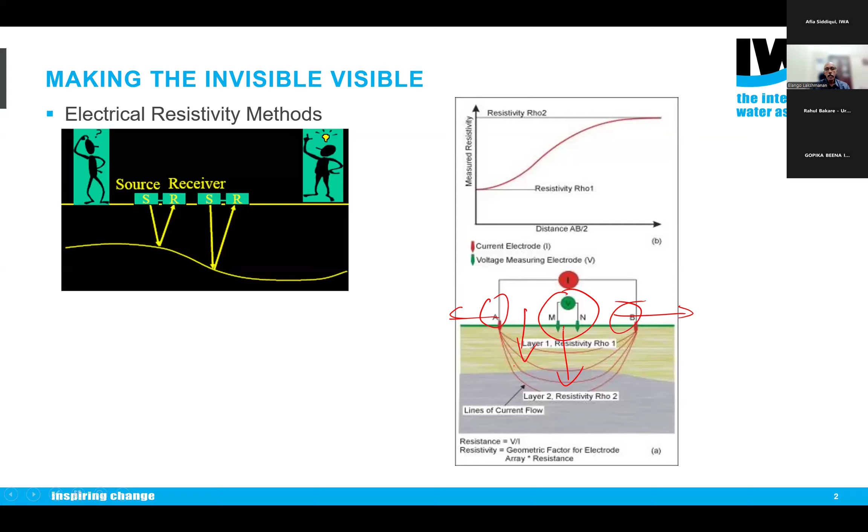This is how we are able to understand whether the formation is saturated, whether it is a clayey formation or sandy formation, and where the water table is. Here is an example wherein we are able to understand the spatial variation in a cross section of the electrical resistivity values.

That means the horizontal line is the ground surface. What you see here is vertically below a long profile. So in a profile, we see the spatial variation in a vertical section with reference to electrical resistivity, with the scale given at the bottom. So what we get from here, though the water is invisible, is that we can clearly demarcate a zone with very high salinity, shown in blue, which is the zone with the lowest resistivity. Whereas this section has high resistivity, probably devoid of any groundwater, most likely hard rock formation. This is how we see what is present below the surface of the earth using the electrical resistivity method.

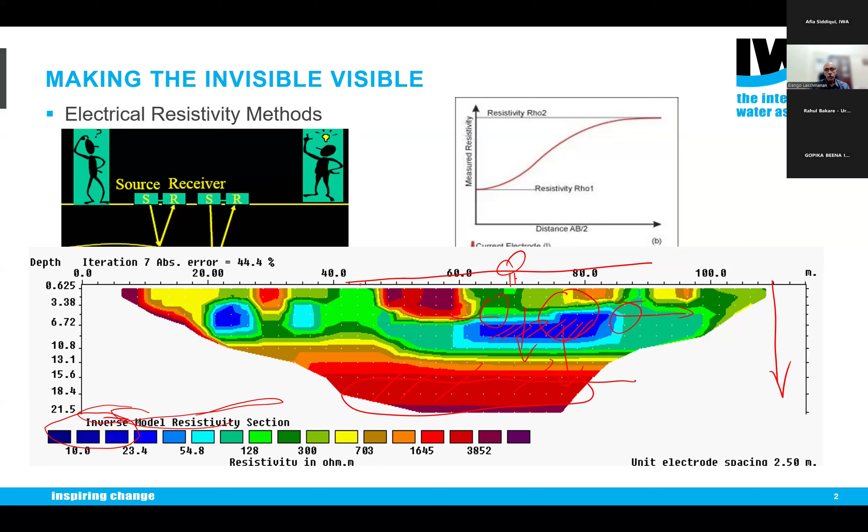Then the other tools are ground penetrating radar, often used to study the shallow subsurface. Here are two case studies where we deployed this ground penetrating radar tool to understand the subsurface beneath a river bed.

Here, what you see is a river, flowing this way, where a check dam was to be constructed to mitigate seawater intrusion just north of the city of Chennai. Before the site selection, we did several traverses to find a location without any confining layer very close to the river bed, so that a recharge structure would perform better. For that, we deployed ground penetrating radar.

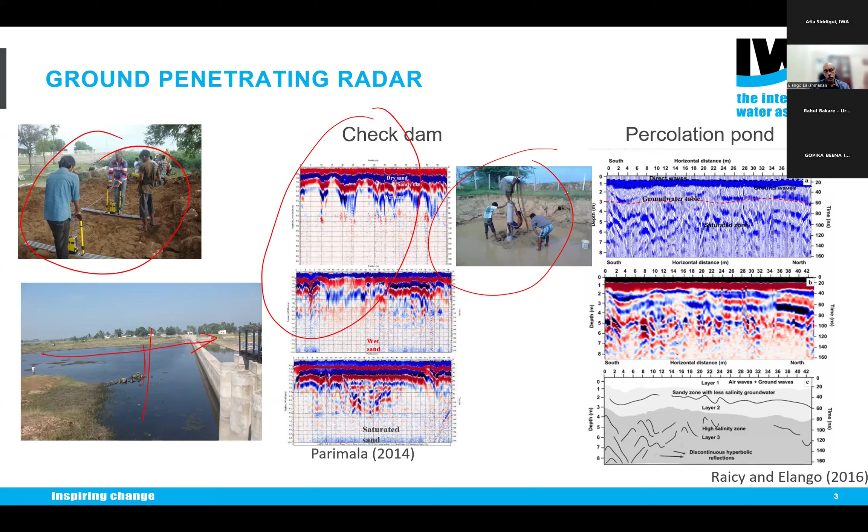Similarly, at another site, due to the need for improving groundwater quality since it was completely saline, a percolation pond with a shaft was tried to identify a suitable site. Ground penetrating radar can be an ideal tool to understand subsurface characteristics. The limitation, however, is it cannot go beyond 25 meters below the ground surface. So this is an ideal tool for locating recharge structures.

Another major tool, very popular over the last decade, is surface nuclear magnetic resonance imaging. In this method, a magnetic field is generated using a transmitter. This transmission changes the way protons are oriented beneath the surface of the earth due to the external magnetic field. When we stop applying the magnetic field, these protons realign themselves according to the Earth's magnetic field, and during realignment they produce a signal, which is measured using this surface nuclear magnetic resonance imaging.

The greatest advantage is that these protons are present mostly in water below the surface of the earth. Hence, indirectly, we make the groundwater, which is invisible, visible using surface nuclear magnetic resonance imaging. In fact, this is the only method which directly helps us identify where groundwater is below the surface of the earth.

There are several techniques. We measure the data by varying the generation of the magnetic field over the surface of the earth and study the response. We can also do what is known as an inversion technique, where we assume a certain subsurface model, produce the signal, then compare it with the measured data. By doing so, there is also an option to understand the water content present below the surface of the earth.

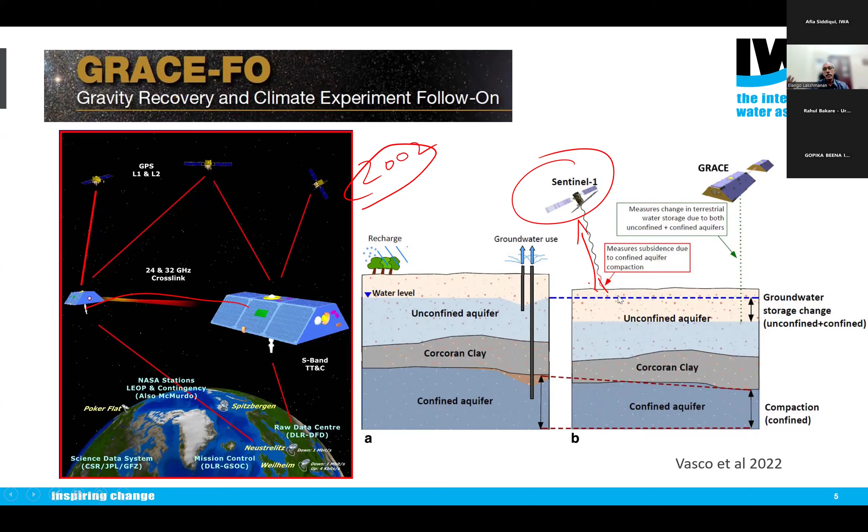So these tools are now available. Especially GRACE data is free, whereas for Sentinel data we have to pay to get the information. Here we have made use of GRACE data to understand how efficiently it is able to predict the groundwater head in and around the Chennai region.

So what we have plotted is both the measured groundwater level along with the GRACE derived groundwater storage. There seems to be very nice correlation. Similarly, with respect to time, the blue line is the gravity measurement, that is the GRACE derived value, and the red is the measured groundwater level. There seems to be a reasonable comparison, except for certain years towards later, which is attributed to seawater intrusion.

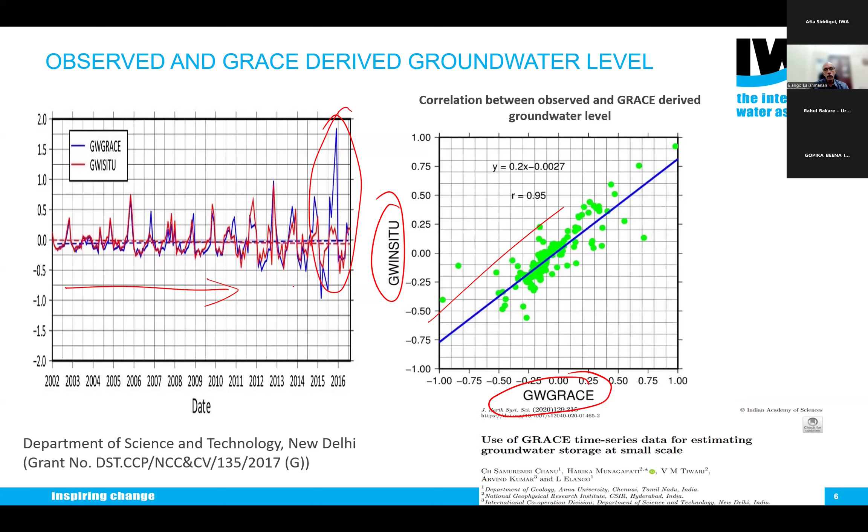Similarly, land subsidence, as I told you previously, can be estimated using synthetic aperture radar satellites. Here there is a tool called SARscape. This tool helps us understand land deformation, since the satellite goes over the same site at least once a month. Suppose you take data after a gap of 2-3 years, we will be able to know whether the land surface has deformed, whether it has emerged or witnessed subsidence.

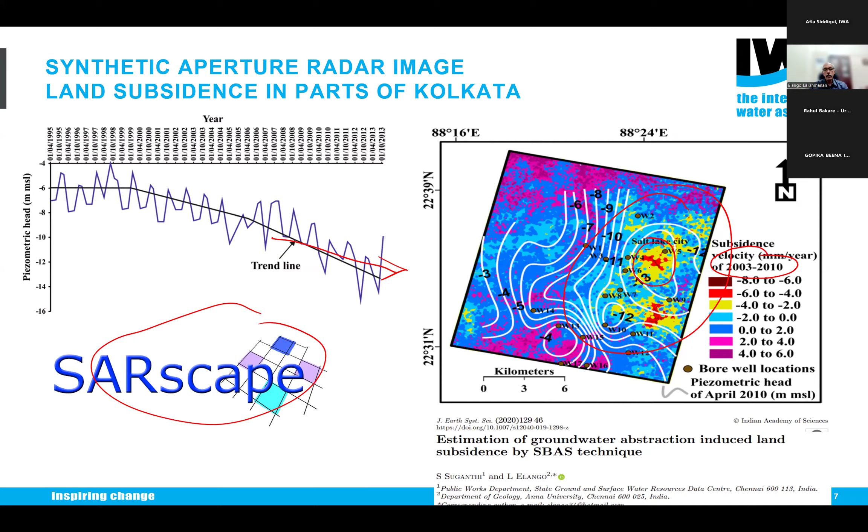Here is an example from Kolkata city, wherein you can see the land surface going down with respect to time. This is a bit old study, from 2003 to 2010, which we carried out using data from that period. That corresponds very well with the measured decline in piezometric head. The white lines here indicate the piezometric surface, which is lowest here, where we have witnessed the highest amount of land subsidence. So this is another tool to rapidly understand the variation in the land surface.

Geographical information system - using this tool, we have studied the variation in groundwater recharge potential zones for southern India. In which we used the AHP technique, which is nothing but a multi-criteria decision making, wherein we fix up a goal. The goal here is to differentiate the entire southern India into highly potential, moderately potential, poor, and very poor zones for recharge.

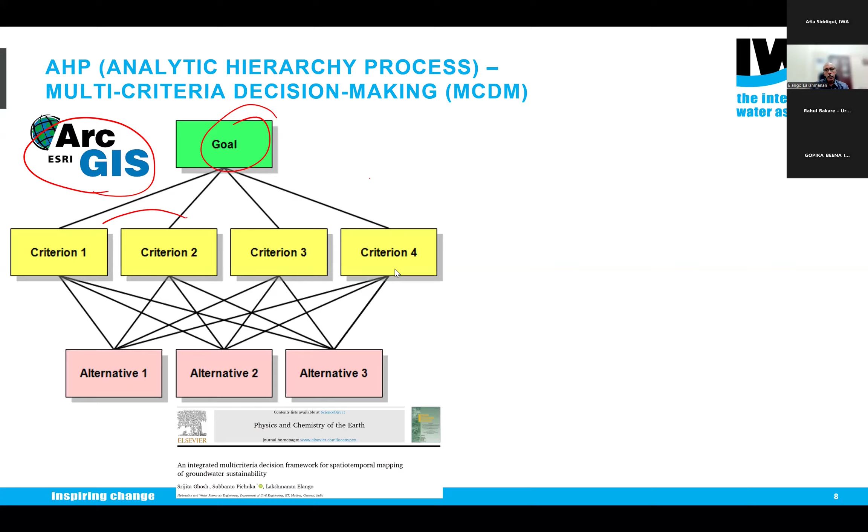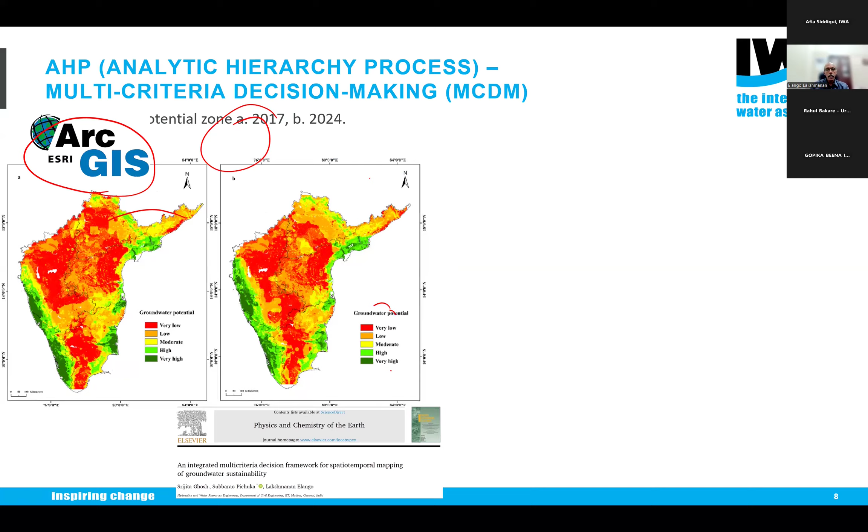So by assigning different criteria, for example geology, soil, slope, and so on, we can come out with different alternatives. Using this tool, we identified groundwater recharge potential zones for entire southern India. The novelty of this study is that we also identified groundwater recharge potential as well as groundwater potential zones.

So we need to integrate this. Whenever we plan for any new managed aquifer recharge structures, we need to identify poor groundwater potential areas wherein recharge potential is very high.

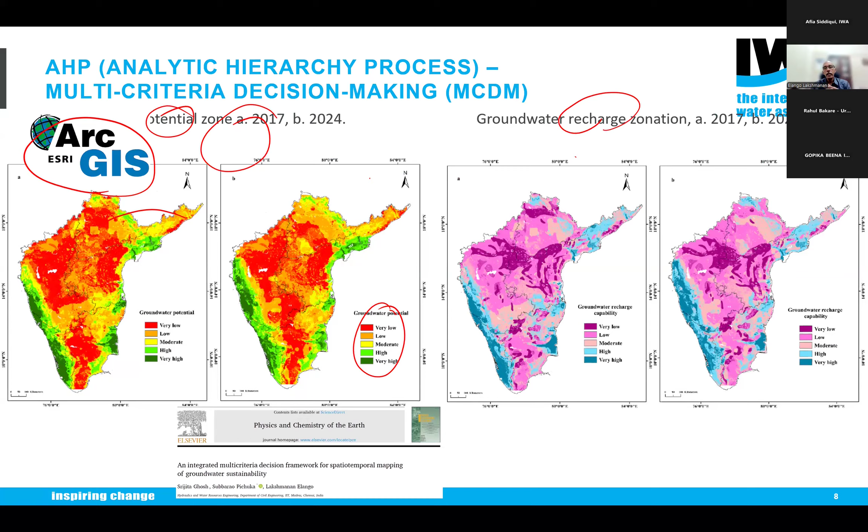This is another tool. Using the same multi-criteria decision-making tool, we selected ideal sites for recharging groundwater in Bangalore city. More than around 10,000 such recharge wells were constructed in Bangalore city, making use of the same technique. We could also get a visible improvement in groundwater level once we completed the construction of these 10,000 recharge wells.

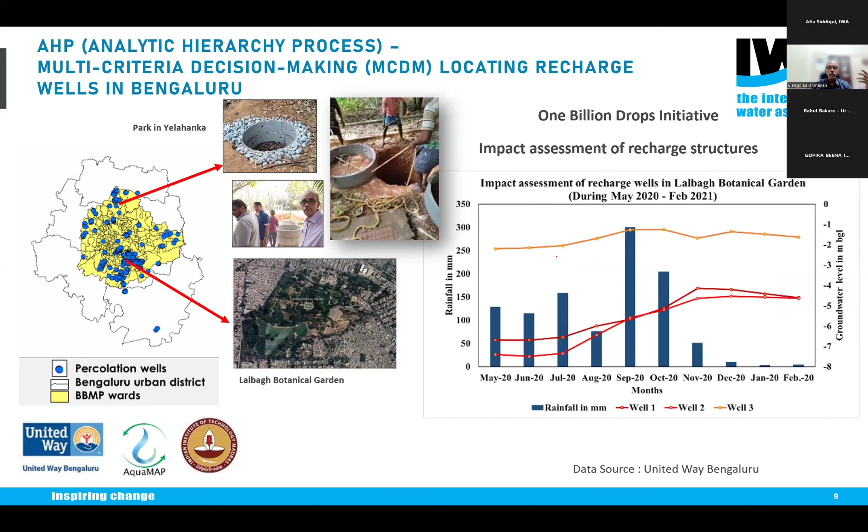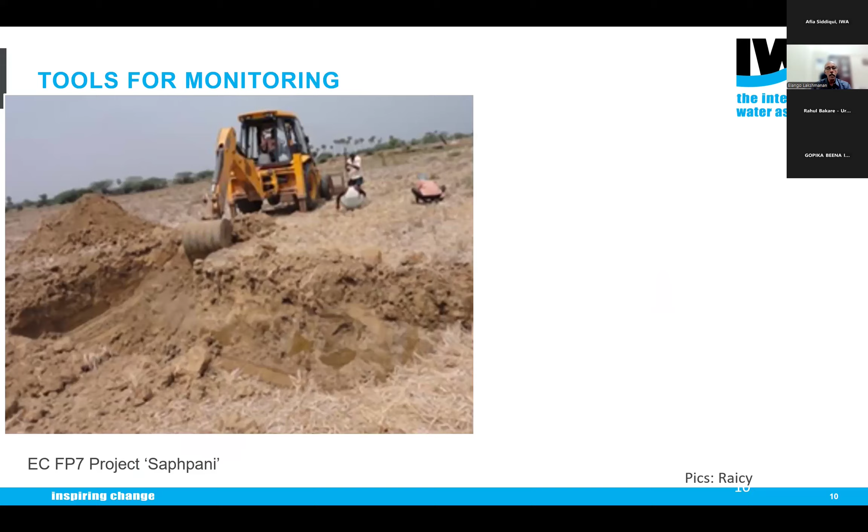There are several tools required for groundwater monitoring. We used several tools in one of our case studies involving construction of a percolation pond, which I had indicated previously, wherein we did a ground penetrating radar. A percolation pond was constructed to improve the groundwater quality for supplying water to a small rural community. The entire area is highly salinized due to the proximity of this site to the sea as well as the backwaters, wherein we constructed a percolation pond.

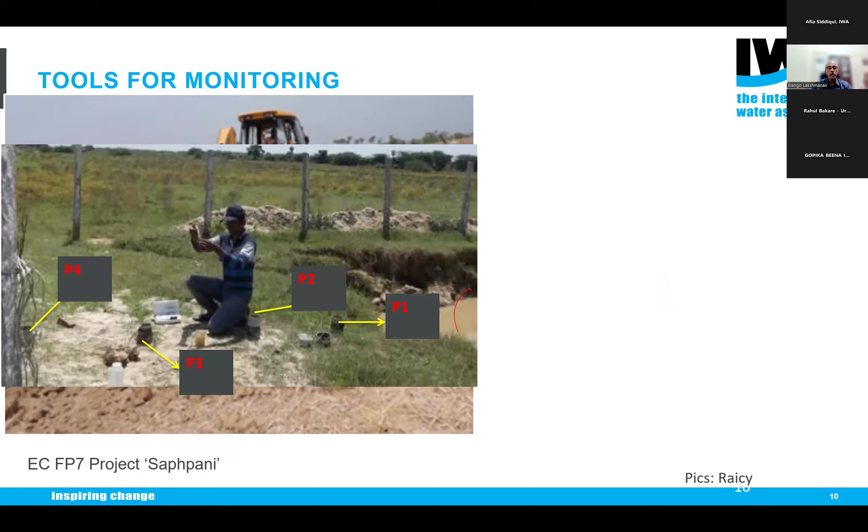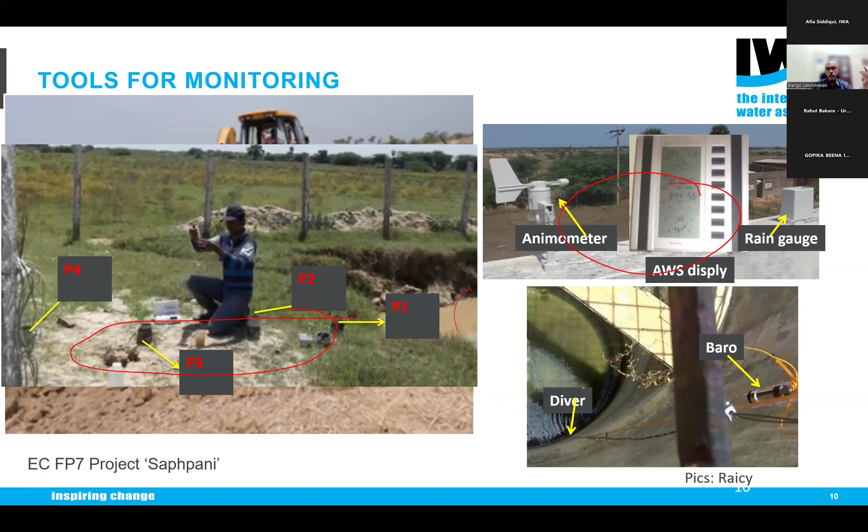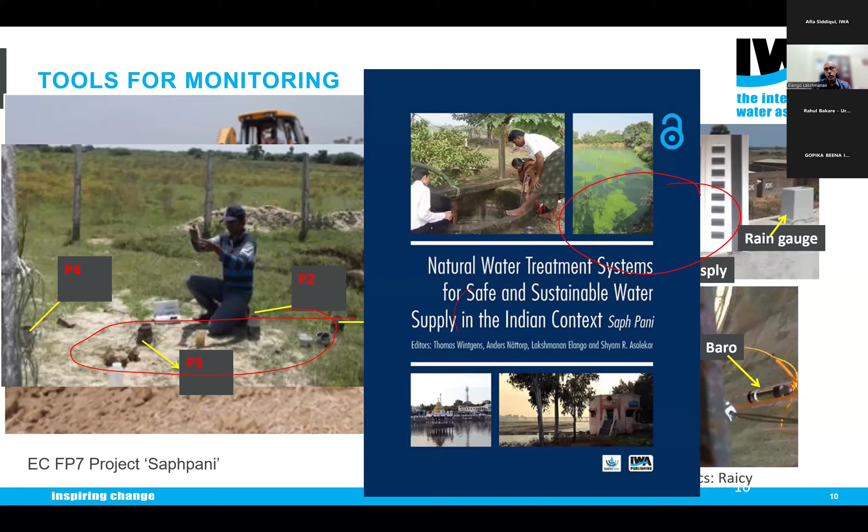In order to understand the efficacy of this percolation, we also drilled 4 piezometers adjacent to it, and these were heavily instrumented using several advanced tools, including an automatic weather station and multiple probes, to understand the groundwater potential in the pond as well as a nearby well and all the piezometers. This research was published as part of a book published by IWA. Those who are interested can have a look into this for more details.

And one of the common problems which we face, especially after severe rainfall, an extreme event, is that suddenly the ground surface gets flooded, and the water table is somewhere here.

This is the groundwater table, but the ground surface gets flooded, leaving a lot of air entrapped between the saturated or flooded surface and the saturated zone. Due to the presence of these air bubbles, water is unable to infiltrate into the groundwater. Though we have plenty of flood waters at the surface, they are not really benefiting groundwater recharge due to the entrapment of air. We thought, how about providing small tubes in the unsaturated zone so that during floods, the air entrapped due to the pressure of flood water may escape through this.

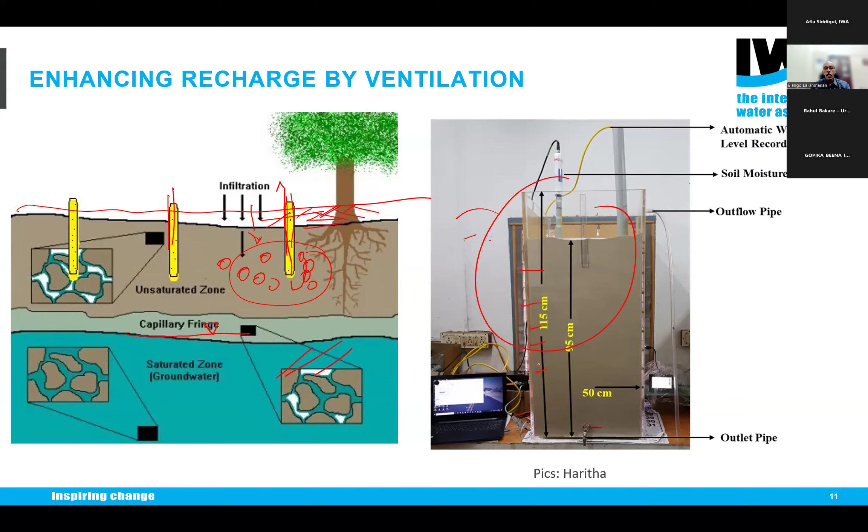This concept was presented to the Ministry of Science and Technology, and they funded a project. So we did several experiments in some sand tanks, as you see here, with moisture sensors kept at frequent distances from the surface. We also put an automatic water level recorder to study the effect of this flooding. Then we also carried out some field experiments.

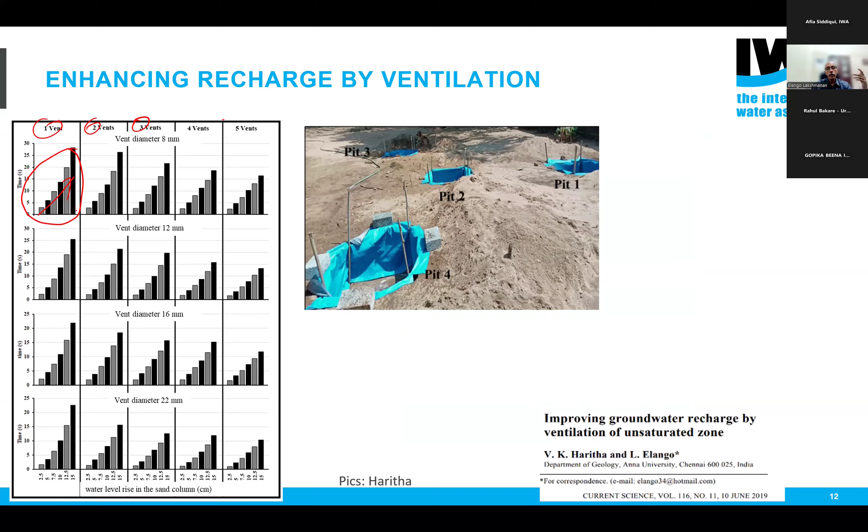The experiments support that the presence of vents, for example 1, 2, 3 and so on, help to quickly recharge the groundwater. This technique is able to overcome the problem of entrapment of air. We also filed a patent for this technique.

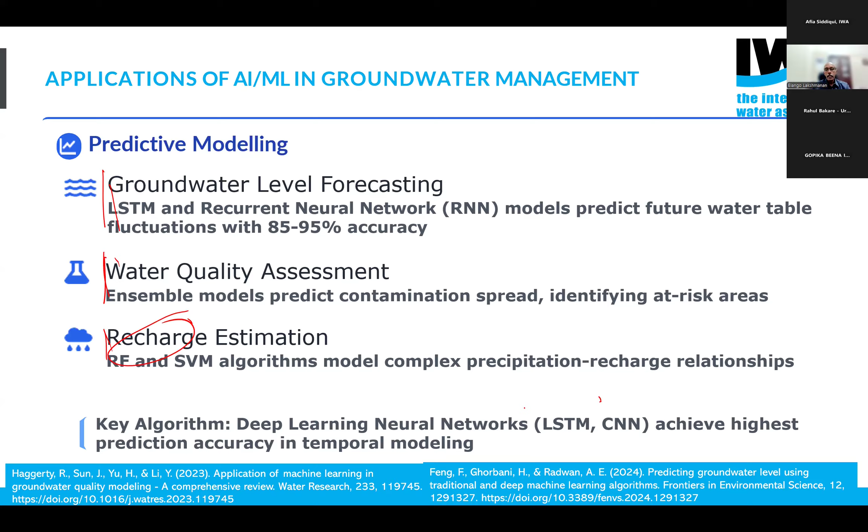Coming to artificial intelligence and machine learning in groundwater, a number of researchers have very efficiently used AI and ML tools, especially for predicting groundwater level, groundwater quality, and groundwater recharge. These are all the popular themes in which people have applied artificial intelligence and machine learning. Most researchers have used these tools to achieve their objectives. I'm just presenting two examples.

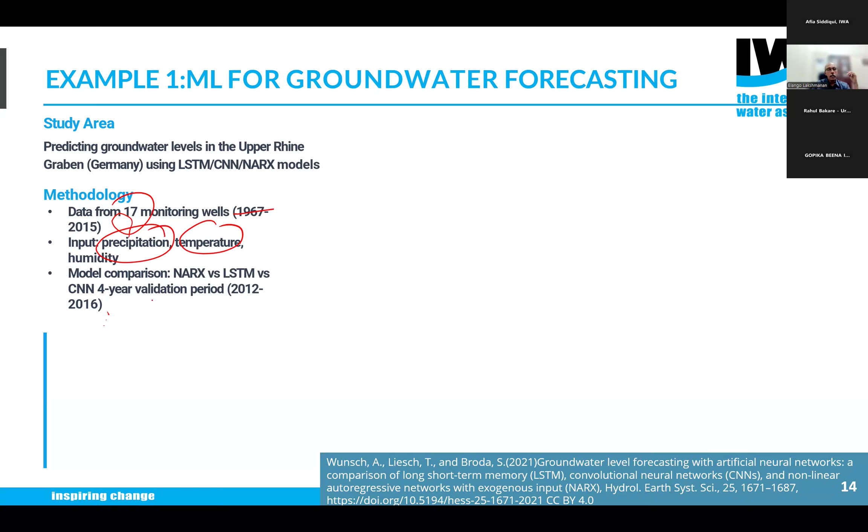In one example carried out in Germany, the authors used machine learning to forecast groundwater level. They achieved reasonably nice results with merely 17 monitoring wells, but they had long-term data from 1967 to 2015, and considered three important variables: temperature, precipitation, and humidity.

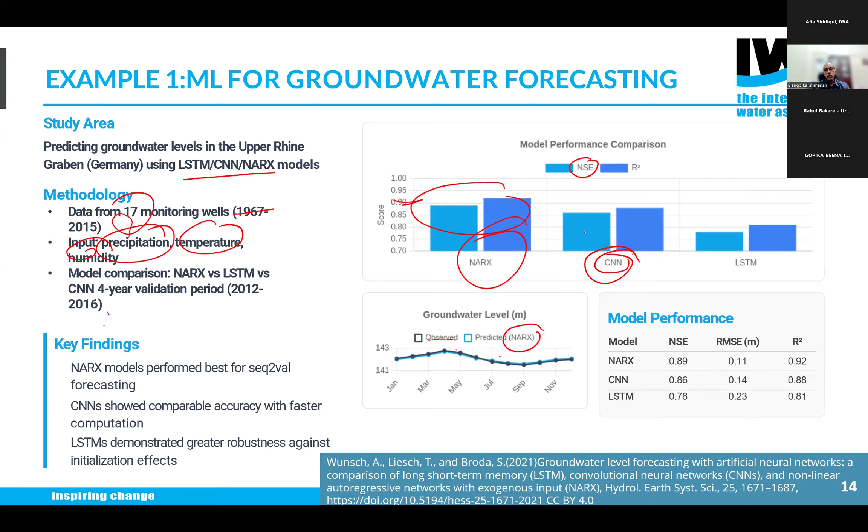We also used something similar to predict groundwater quality in one part of India, in Karnataka, where we have been collecting groundwater samples once every 3 months for about 4 years from over 50 wells, for which we applied machine learning coupled with an ant colony optimization tool.

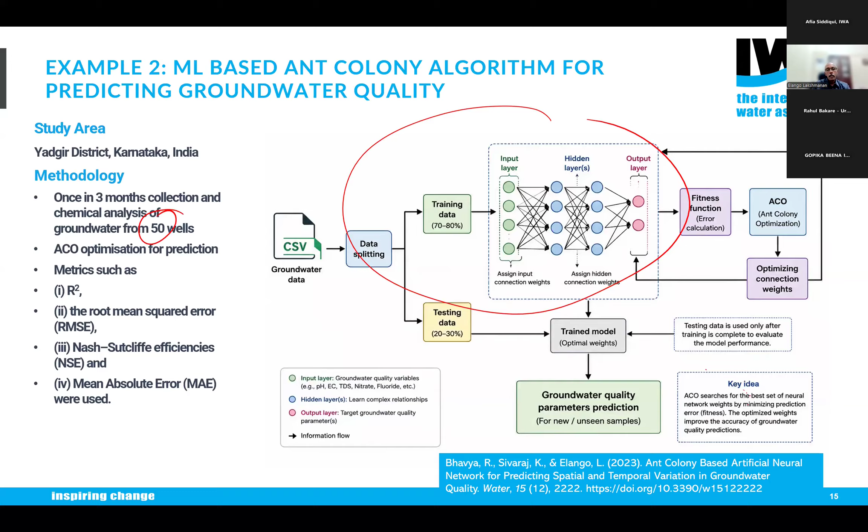Let us not go into depth here; this is published, and details are available in the paper at the bottom. What is interesting is that we used nearly 70% of our data for training, and the rest of the data was used to test the results of the model.

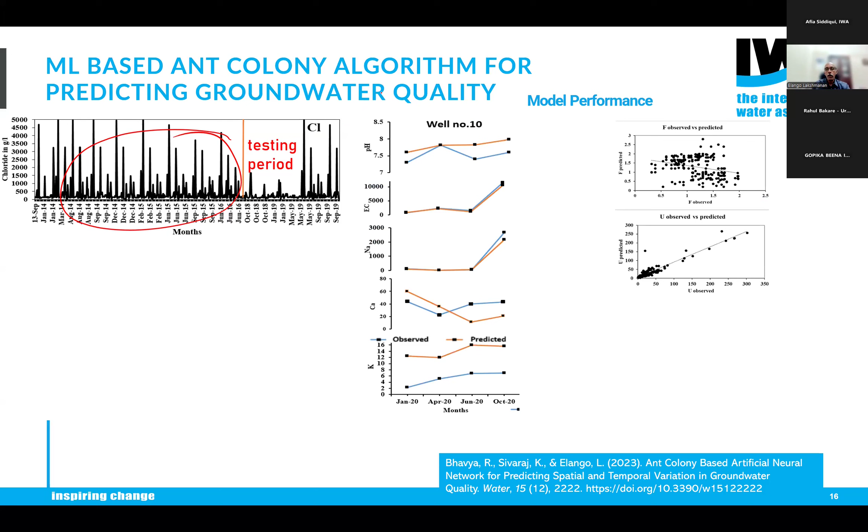Here I'm showing you results for uranium concentration, which is very important. There is a reasonable comparison between the model predicted and observed values. We also checked how the 50 different well models predicted concentration, and then used an inverse distance method to extrapolate the concentration over the entire area.

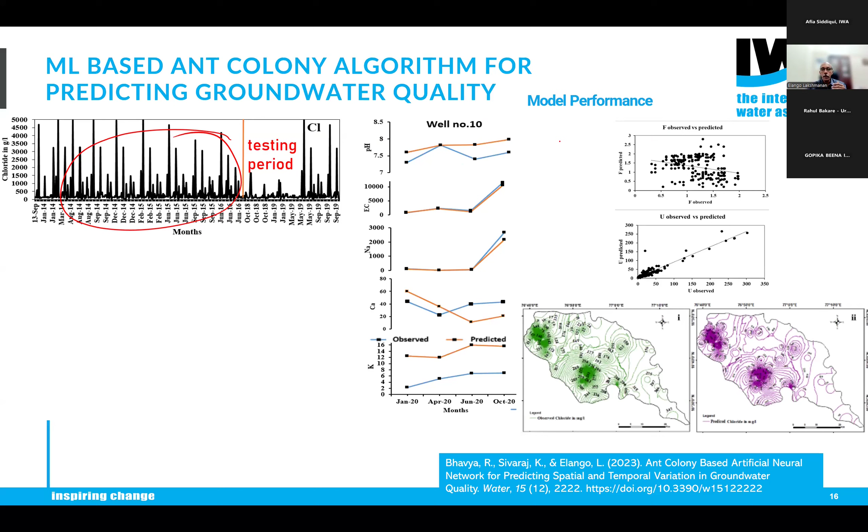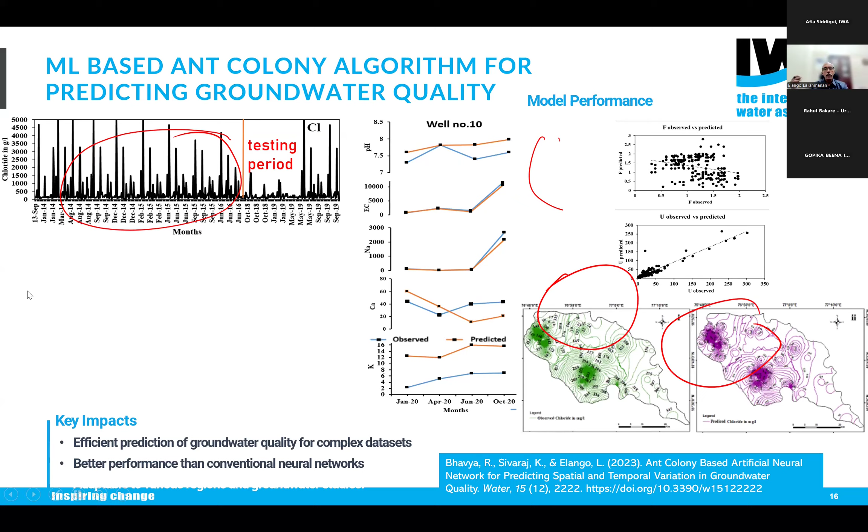We compared the observed values, shown on the left in green, with the model predicted values on the right, and there is a reasonable comparison. So these models are able to very nicely predict groundwater quality. Though we are using several other contaminant transport models, this machine learning tool seems to be a very good way to estimate groundwater quality.

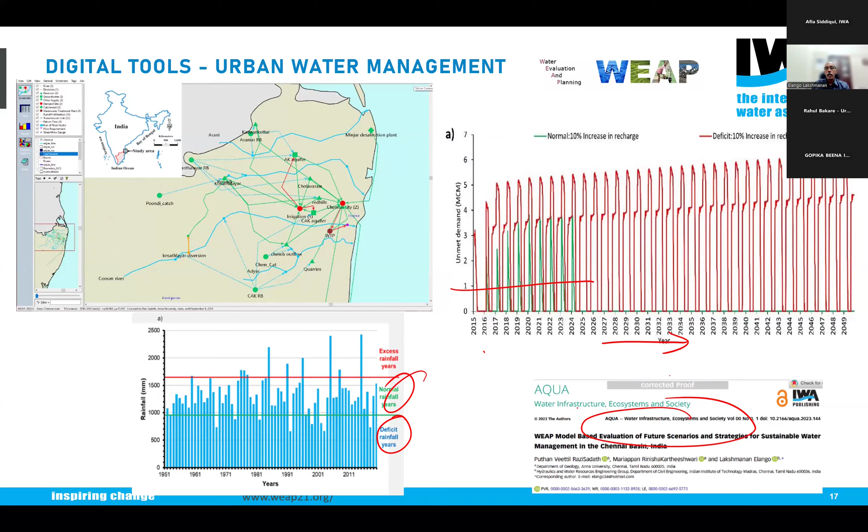We played with the model by considering different rainfall patterns—excess rainfall every year, normal rainfall, or deficit rainfall—and how much the unmet demand would be. Suppose we put forth 200 MLD of used water into the supply chain, how would we meet the unmet demand? Details are available in this paper. So this is how the WEAP model can be used.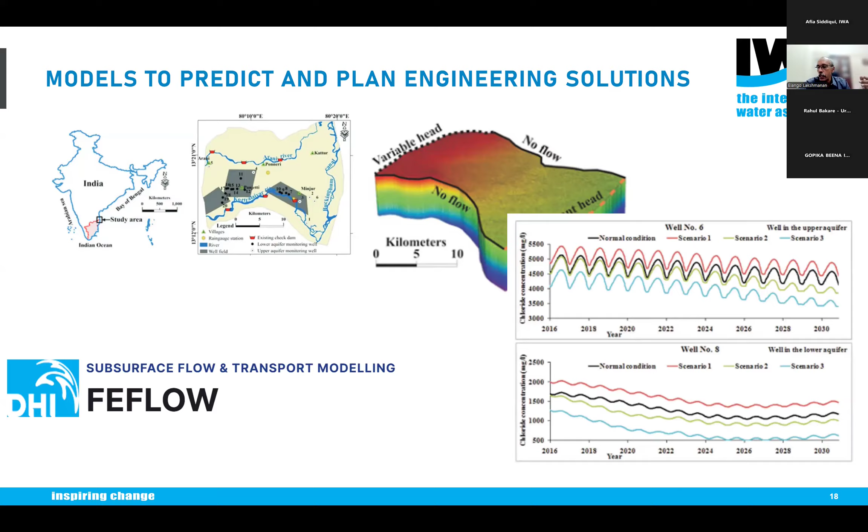We also ran the model to forecast different climate change scenarios, and what you see here is the impact of this. To conclude, we are currently working on a major digital twin. A digital twin is replicating what exists in nature into a computer-based system with real-time analysis and people's participation, wherein we are coupling several models. It is a collaborative project between India and Delft. That is it, thank you very much for your attention.

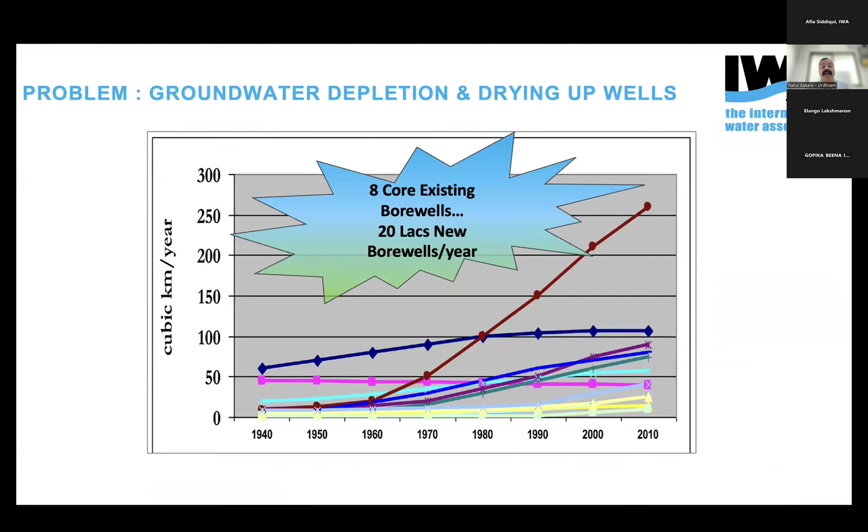India is the largest user of groundwater, with around 8 crore, that is 80 million, existing bore wells and open wells. Through that, we are overexploiting groundwater to a great extent—so much so that farmers are committing suicide, women have to walk far away places, water has to be supplied through tankers, and water quality is becoming a major issue. In some cases, uranium and chromium have started appearing in groundwater. Groundwater in the Indian context is one of the major water sources—80% of India depends on groundwater, and this is the problem we are facing.

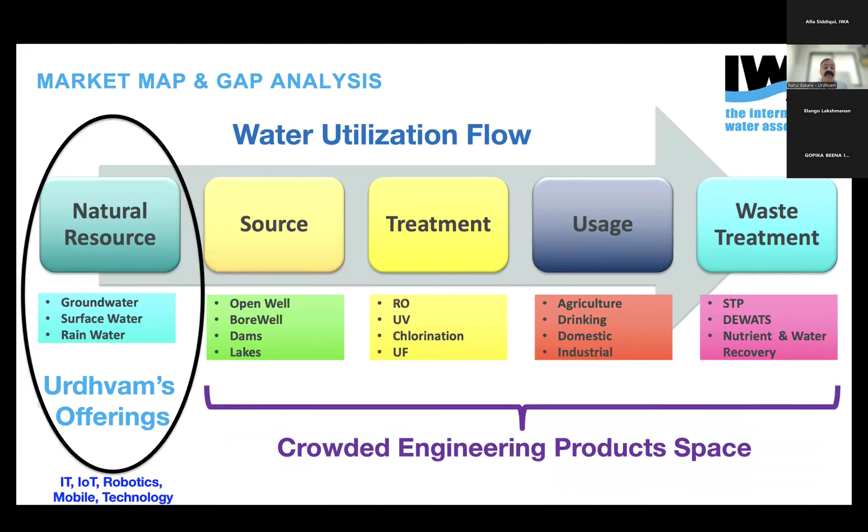When we map the water utilization flow, we realize there is something called a natural resource, which needs to be developed and treated, then it's used, and wastewater is generated and treated. That is the water utilization flow. From source development to waste treatment, there is a lot of crowded engineering product space. We provide solutions for the sustainability of natural resources—be it groundwater, surface water, or rainwater—using a lot of IT, IoT, robotics, and mobile technology to solve people's problems on the ground.

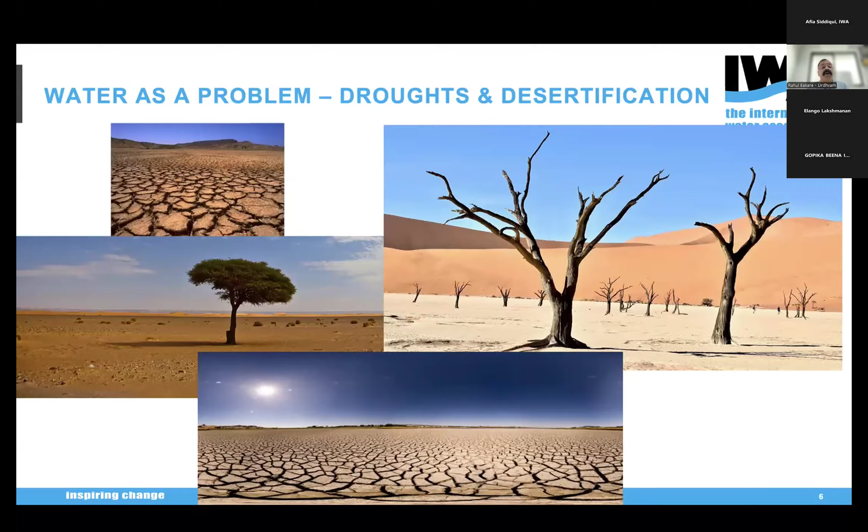So why do we need to think about groundwater? Because groundwater is invisible, it is unseen, hence not understood, not appreciated, but it is creating tremendous amounts of problems, and that's why we should learn about it. Because of groundwater issues, droughts and desertification are happening all across the world. Groundwater is also one of the reasons why deforestation is happening.

A lot of deforestation is also happening because of climate change. The recharge regimes are changed because of the change in rainfall patterns and intensity. It's also creating deforestation and droughts, and desertification. Afforestation is a solution for that.

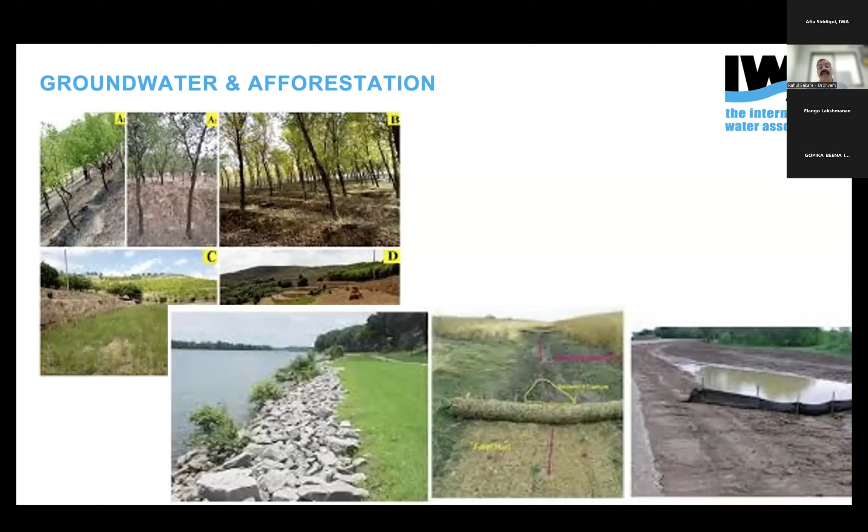But currently afforestation doesn't take into account groundwater regimes. People should know where to plant which kinds of trees depending on the hydrogeology. Typically afforestation is done based only on agroclimatic zones, but for the plants to live, sustain, and grow, one needs to understand groundwater hydrogeology.

Rivers are drying up. In many places rivers flow only during the rainy season, and during the non-rainy season there is no water because the base flows have dried up. Why have the base flows dried up? Because water in the unconfined aquifers in many parts is pumped at a much faster rate than nature can replenish, so base flows are reducing and rivers post-monsoon are not providing water to the civilizations.

Water is also a major problem because when we construct a road or create an escarpment, that creates a weak zone for hydrostatic pressure to be applied, and that creates landslides. Landslides are also caused by friction between particles, pebbles and stones getting reduced because too much water seeps into the location. Unfortunately, many construction activities - houses, roads, even watershed treatments - are done without any understanding of hydrogeology, which creates more problems than it solves.

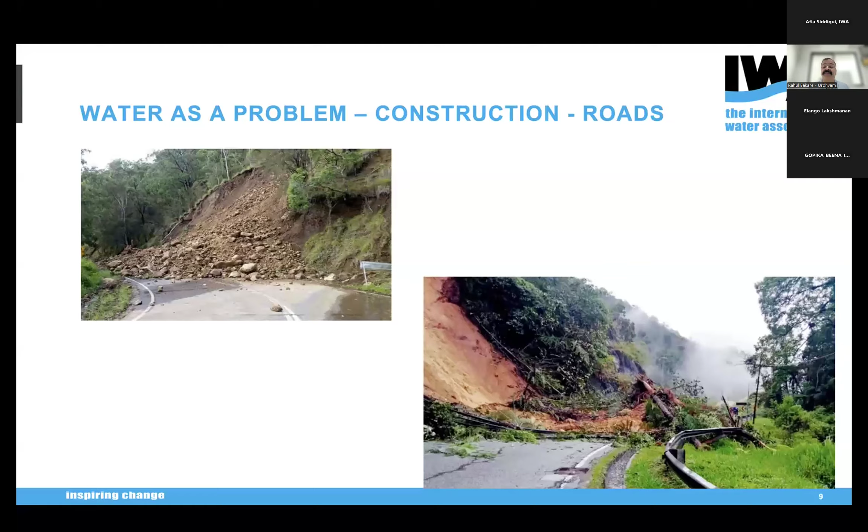We have seen near my city a village which was entirely swept away by a landslide, because without understanding the hydrogeology, a huge tank was constructed upstream, which was a farm pond. That farm pond during a very torrential rain evening succumbed to the water, which created tremendous force on the slopes, and the entire village was flooded and buried under mud.

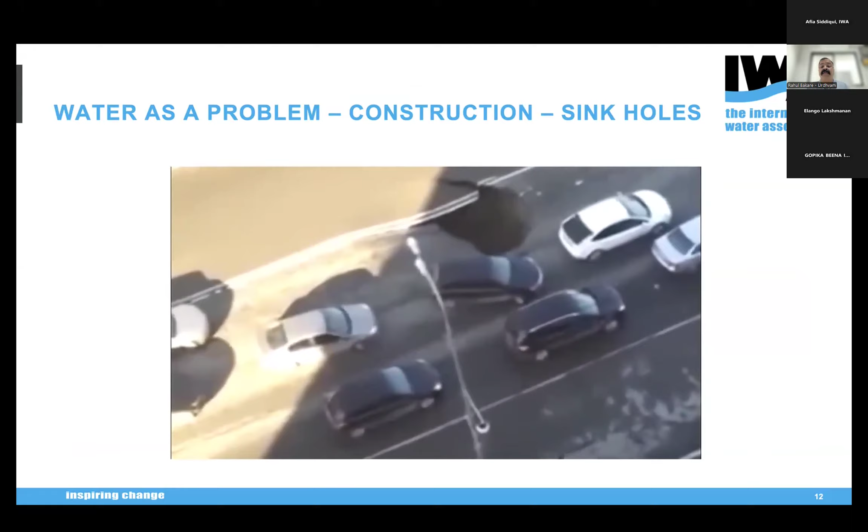This happened because people didn't understand the hydrogeology when constructing that farm pond in that location. At the same time, we have also seen sinkholes happen in many places because of not understanding the underground water regimes, causing a lot of destruction.

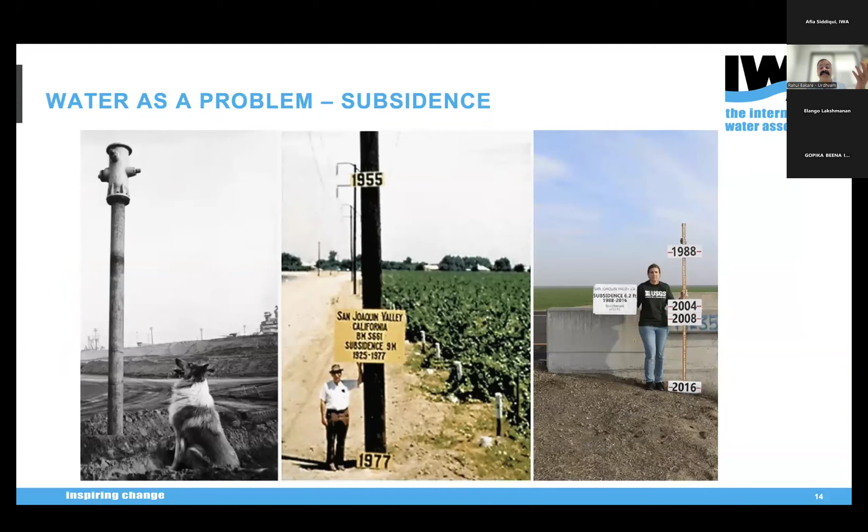Groundwater also causes foundations to fail or topple over, and households also topple over. Land subsidence is another major issue faced by many people. In the California context, 9 meter subsidence is seen in some places, creating tremendous problems to groundwater assets.

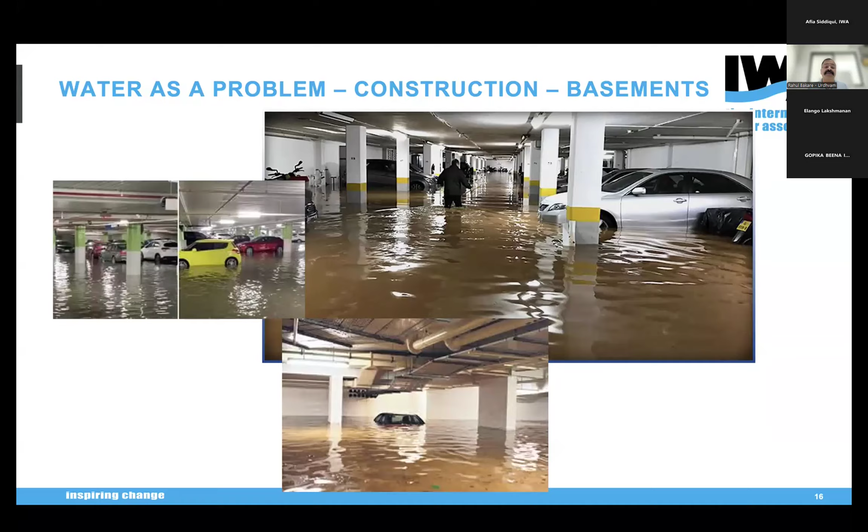These are the basements which are flooded every rainy season in India, because hydrogeology is not taken into consideration while constructing those basements. Hydrogeology is very important, critical, and crucial, but unfortunately it is not considered. It is considered while mining, but even there, flooding of shafts and mining shafts is already seen.

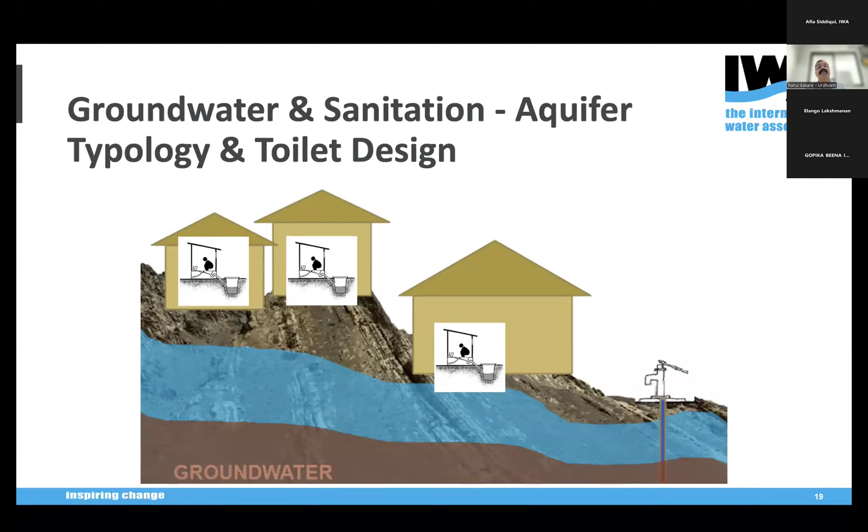Lastly, groundwater also needs to be considered while developing sanitation infrastructure. In the Indian context, pit-type recharge systems and pit-type toilet construction create tremendous problems in the rainy season, because a lot of that water becomes groundwater and gets transported downstream. So even something as simple and distant as sanitation needs to take hydrogeology into consideration.

There are three major gaps in the groundwater domain that we have seen. First, awareness and education among the general masses doesn't exist. People don't know - they have vivid imaginations about groundwater, whether there's a stream flowing underground, or a pond, or a sea of sweet water, but nothing of that sort exists. Unfortunately people have that kind of visualization. Second, people want more and more supply for their day-to-day and economic activities.

People want more and more water, and groundwater supply is not managed properly. So demand management also needs to happen, because a lot of water is given to plants in agriculture through furrow irrigation, and because of that a lot of water gets lost in evaporative losses.

So we work in awareness and education. As I said, awareness education is a very important part of it. We have developed a gamified visualization for education and awareness generation on groundwater behavior, because giving people animations, they are not able to imagine it.

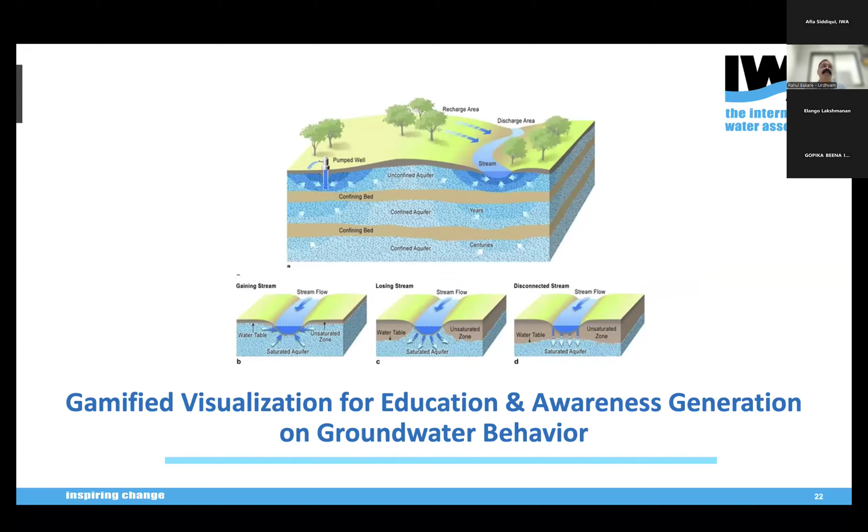So we have developed this see-through model of groundwater behavior, on which kids or even adults can put rain on top of it and see how the groundwater behavior happens. It can be simulated through gamification of education, where difficult to visualize 17 to 18 scenarios can be generated by themselves through play, and by that they are able to understand groundwater behavior. Because it is gamified, there is better retention of this understanding in their brain, and long time recall happens. That's what we have seen and observed in the Indian context.

We also work on supply augmentation. We have developed a patented smart rainwater harvesting technology that recharges and revives existing low yielding or dry bore wells, in which we do inter-aquifer transfers, with due scientific understanding.

When rainfall happens, the topmost part of the earth system gets filled up very quickly, but through different hard rock layers, for the water to reach up to 200 feet it takes hundreds and thousands of years. And from there to reach up to, let's say, 600 feet, it takes thousands of years. So that is the slow nature of groundwater recharge.

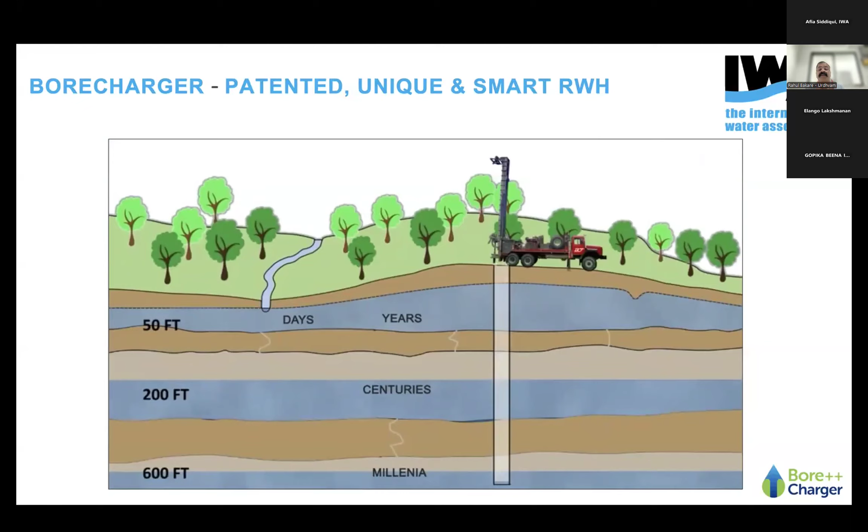But when we drill a borewell, the driller makes one hole up to, let's say, 600 feet within one day. What we see on the surface is a casing pipe, impervious PVC or MS steel pipe, which doesn't allow any debris to fall into the borewell. But along with that, the replenishable water from the topmost aquifer also doesn't enter the borewells.

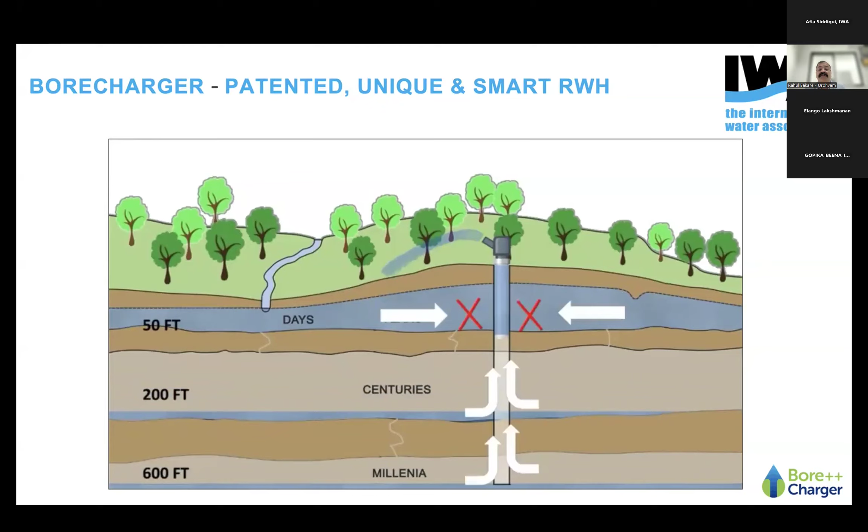So borewells typically get water from the lower aquifers, whose natural recharge is very low and slow, but our electromechanical pumping is very fast. Because of this imbalance, typically initially good yielding borewells slowly become seasonal, and many of them go dry completely.

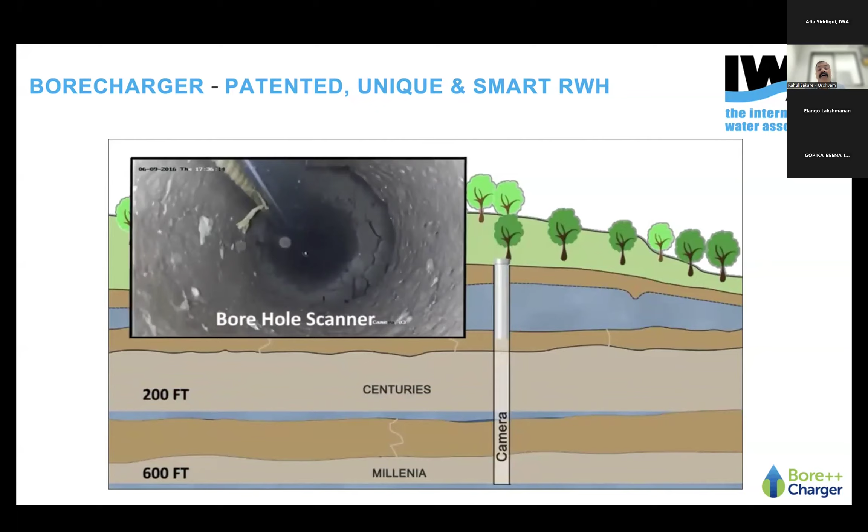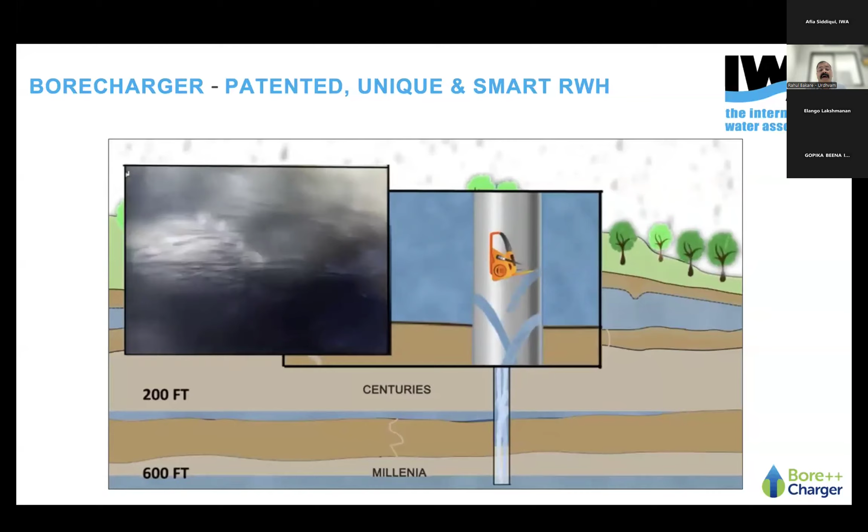So in bore charger technology, our trained hydrogeologists undertake angiography of the borewell, and we put our patented tool after in the borewell, and we perforate that casing pipe at hydrogeologically appropriate depth, so that only filtered water will come into the borewell, and it artificially gets injected into this borewell, reaching 600 feet within few seconds - what would take thousands of years - and gets readily stored at those greater depths.

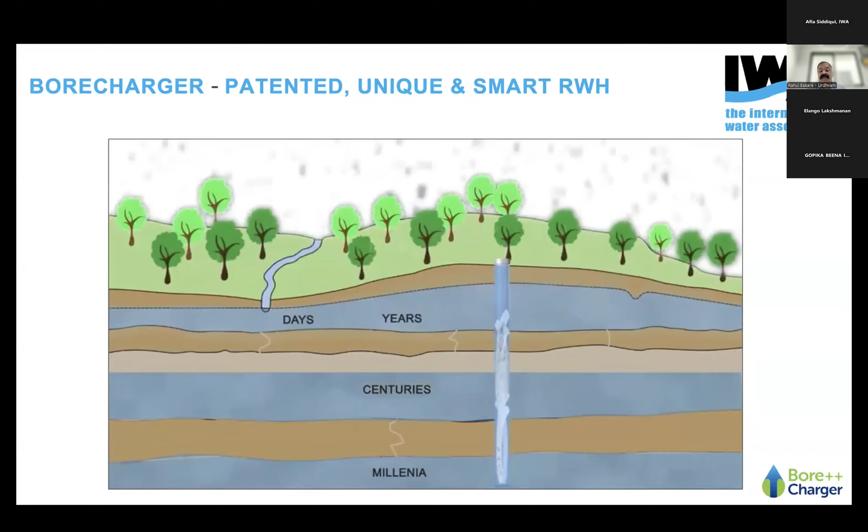So this is kind of a vertical smart rainwater harvesting technique that we have been able to develop, and we have implemented more than 7,000 borewell recharges, and we have seen tremendous amount of traction. These are some of the classical successful implementations.

What are the real world problems faced by people, and what's the impact of bore charger technology? Nabi Saab, a farmer whose agriculture income was very low because his water level used to go down to 450 feet every year - because of bore charger technology, his agriculture income rose by 85% within one year itself, because he started getting 6 hours per day of water compared to 1 hour per day during summertime.

Shivaji Suryavanshi, a sarpanch, a local body chief - his village drinking water borewell was pumping only 30 minutes per day, and his village was water insecure. After bore charger implementation was done, this pumping increased to 4 hours per day, and his village became water secure.

Rakesh Koti, an urbanite, had 15 minutes per day worth of borewell water. It increased to 3.5 hours per day, and his completely dried up borewell also started yielding because of this inter-aquifer transfer. Because of that, he saved 600,000 rupees a year towards tanker water supplies.

So overall, the socio-economic and ecological impacts of bore charger are quite clear. We are able to increase the recharge rate 4 to 20 times, anywhere between 200,000 to 8 million liters of rainwater gets added to the borewell every year.

This increases supply by an additional 1 to 6 months, and along with quantity and quality improvement, we have seen a 95% plus success rate. We have reduced the vulnerability of farmers to weather shocks, and we have also reduced a lot of tanker water supplies.

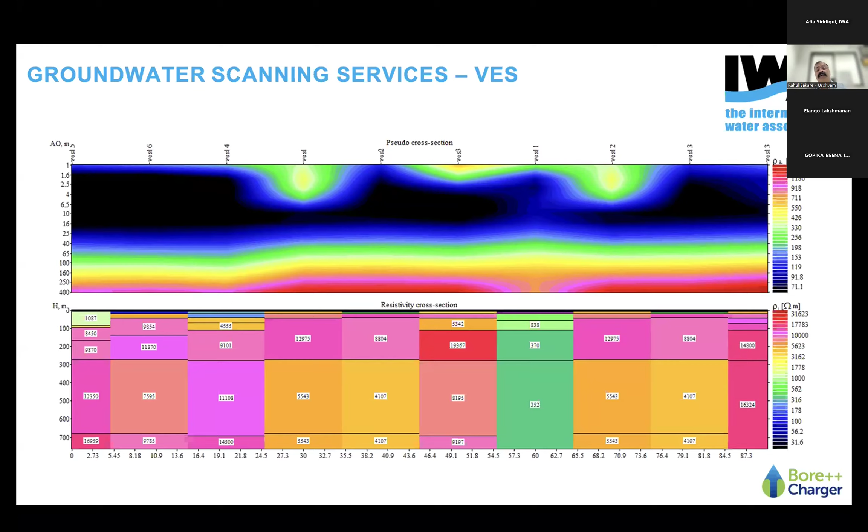So how do we use this kind of cross-section of the Earth system, invisible to our naked eyes? When a diviner gives a borewell location here, it obviously won't fetch much water because the dark blue zones, which are highly porous, don't have much interface with this borewell. But if we had done this scientifically, we would have shown a location that would yield much more water.

Same goes for the rainwater harvesting pit. If it's placed here, in this yellow-green zone, it doesn't have that much porosity, so it won't be efficient. But if we use scientific methodology, we can identify a better location for rainwater harvesting.

The same applies to the location of an open well or a recharge pond structure for a watershed. I myself have evaluated many watersheds where the end user says, 'Sir, in February we still see so much water in this percolation pond.' But you cannot call that a successful implementation, because water remaining in the tank till February means it has not percolated—so you've created a storage pond instead of a recharge pond.

We have worked with many CSRs, NGOs, and government programs, first studying the watershed with the help of hydrogeology, land use and land pattern change, slopes, and many other factors. Based on that, we do aquifer mapping of the entire space and then provide scientifically correct, accurate, effective, and efficient locations for the structures to be constructed.

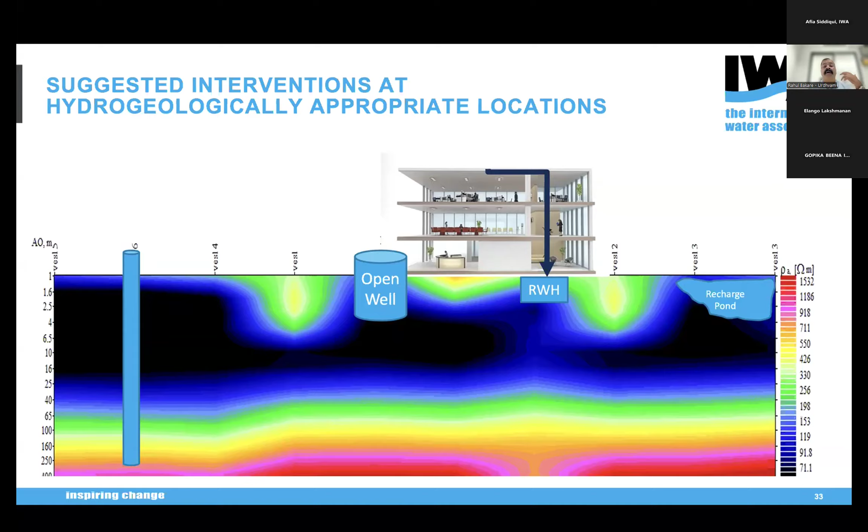So groundwater is extremely important. We also use geomagnetic technologies to understand the potential to find water underground. Lastly, from the demand management side, we developed Jalstr, a scientific groundwater measurement and prediction technology—basically a piezometric sensor that is IoT enabled, giving real-time visualization and predictive analysis.

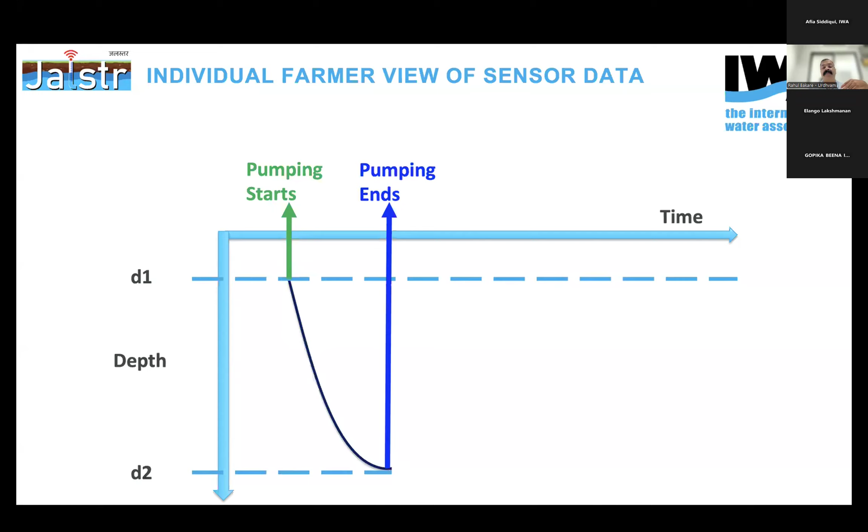To give a classical example, for one sensor or one borewell, we can see when the pump starts, the water level is here. After some time, the water level goes down with pumping, and when pumping ends, the water level reaches another depth, much lower than before. After pumping stops, the water level also recuperates slowly.

For one borewell, we are able to provide the volume of water pumped out. With this, farmers are now able to undertake informed decision-making, such as which crop to plant next, cropping area, cropping variety, and so on. Based on this, many farmers have increased their income, and many have also been able to take additional crops during summertime.

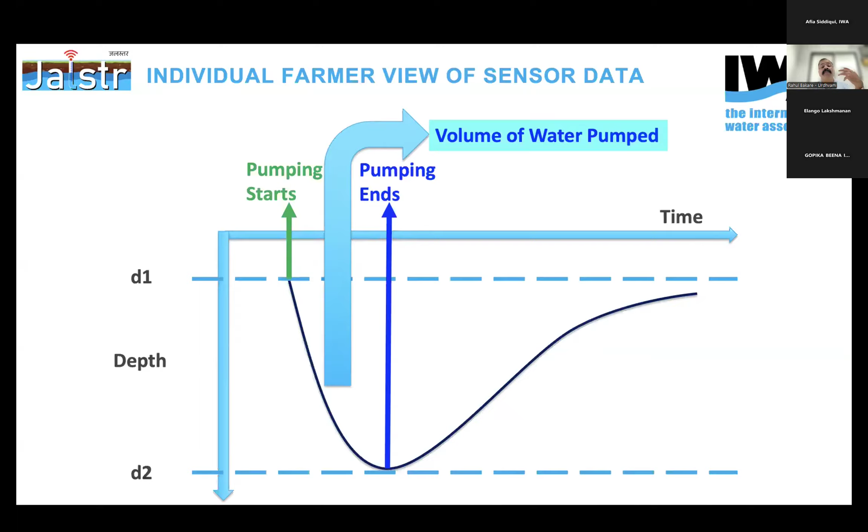Many farmers have been able to do a good amount of animal husbandry because of this kind of advisory and input which is given. Now the core offerings are: we are able to provide very high frequency data, real-time visualization analysis, and most importantly, the advisory on data analysis and prediction.

As you can see, we have this data from November 24 to January 26. The pumping for the domestic use of this bore well was clearly showing a certain pattern, but during monsoon the recharge happened, and again the pumping happened for the domestic use. Now, with the help of a lot of contiguous data, we have been able to predict the data.

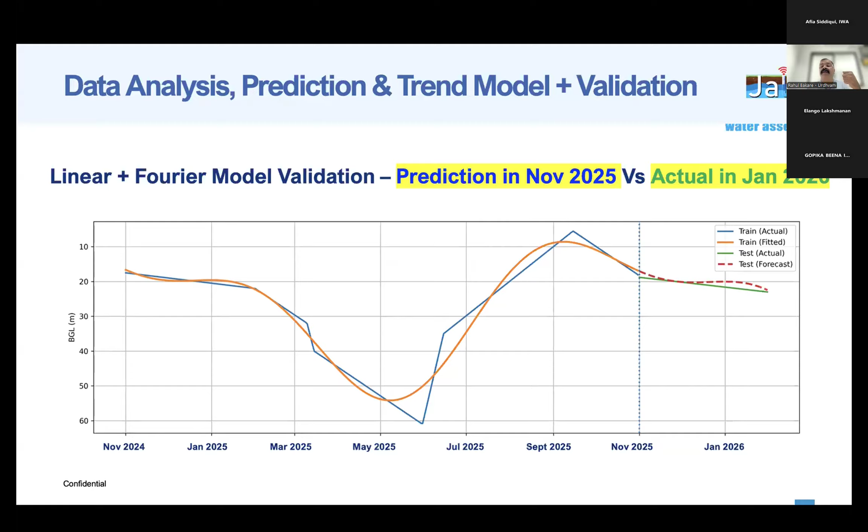So in November 25, when we started prediction, the green line on the right hand side - actually the dotted line on the right hand side is a test and the forecasted water line based on the past previous data. But the green line is something which is quite matching, which is the actual data which we have been able to measure and predict. So the prediction based on AI, ML, as well as certain statistical methodologies, we are able to achieve a good amount of accuracy.

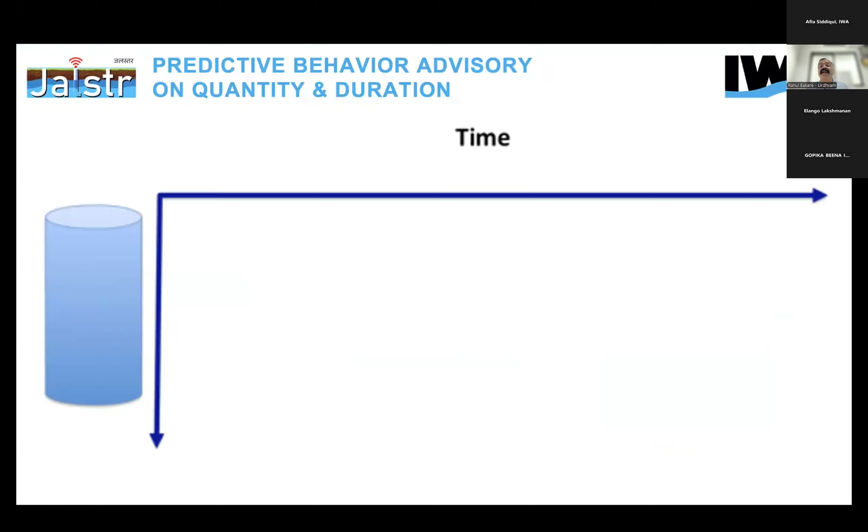So we are able to provide tremendous amount of input which people are not currently getting, as a matter of fact. But when we look at this prediction over a long period of time, we are able to predict water level data as well as predicted quantity and duration of water supply as well. So that's the predictive behavior advisory we are adding value into.

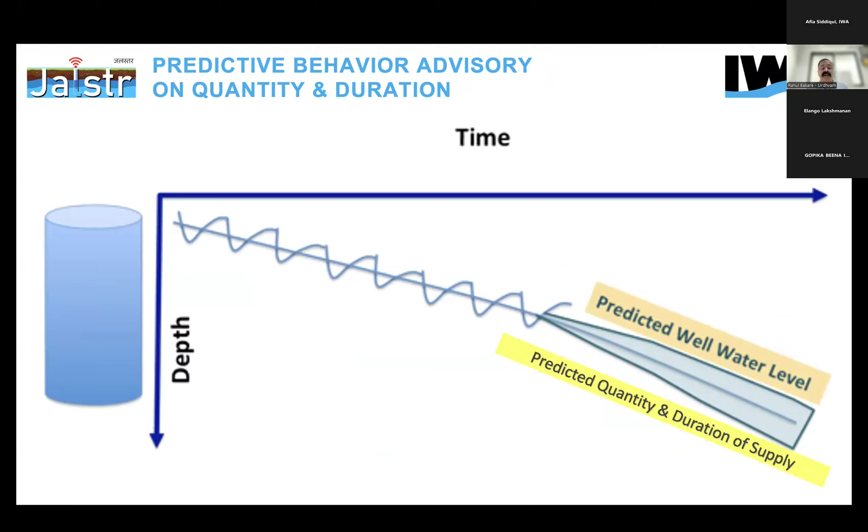With these sensors put in a specific watershed or village, we are able to develop aquifer health status, which the villagers can see on their big monitor in their Gram Panchayat, and are able to see what's the water level through an animation which they are able to understand. So again, through gamification of the information, we are able to give them better understanding and visualization.

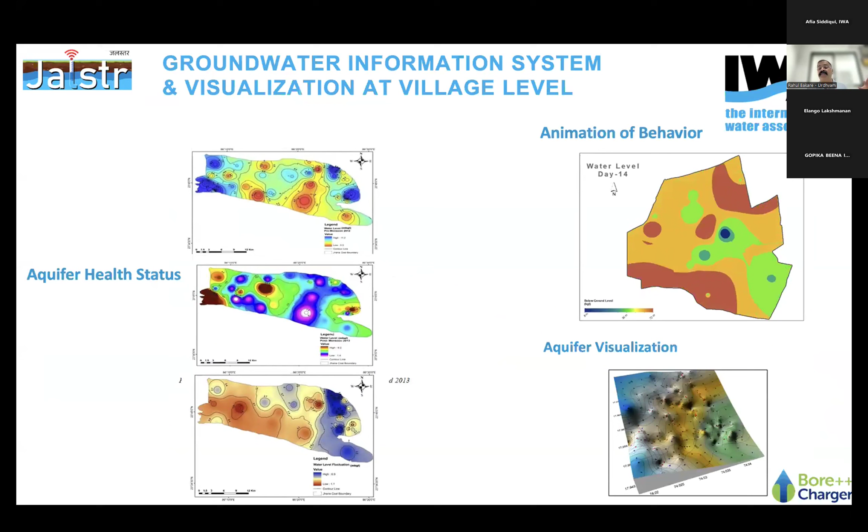And also 3D visualization can be done with this kind of continuous data at a very frequent level. So we have been able to tremendously impact farmers, rural communities, households, industries, as well as NGO, CSR, social impact, environmental impact programs as well. And we are working with governments and regulators as well.

So now, how do we convert all these things into a scalable model? Basically we have our regional offices and we are serving the farmer, industry, townships, which are the real world beneficiaries of our services. But through this model, we cannot scale up. So the idea is by training local youth and converting them into para hydrogeologists - in which they are not hydrogeologists.

But they would be able to collect a lot of data on a very frequent basis, and they would be transferring the data to us over IoT, and through automation of our technologies which would give in their hand, we would convert them into our franchises.

So they would be our on-field implementation arm, and through that we would be converting them into franchises, and those are the ones who would provide tremendous amount of affordable, scalable services at that local level, wherein we, using IoT and the cloud technologies, can do a lot of visualization, modeling, assessment, analysis in our head office, and we would be able to provide advisories to people.

So with that, let's recharge, replenish, and revive groundwater, especially for our future generations.